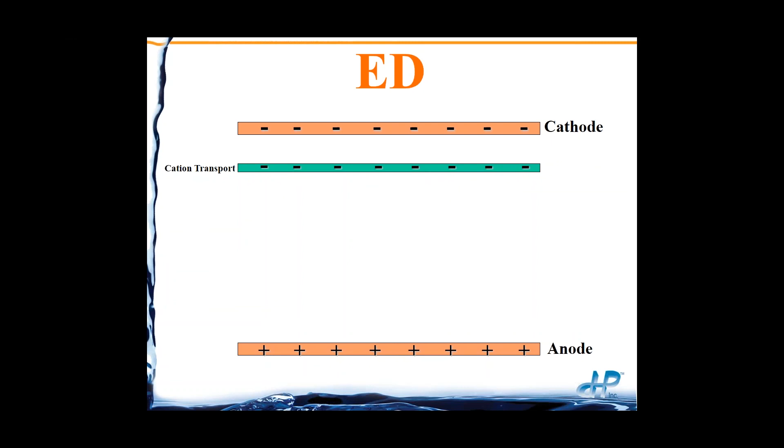And then in between these electrodes, we're going to put basically ion exchange resin sheets. But in this case, we're not worried about ion exchange. We're really just wanting to transport cations across cation transport membranes and anions across anion transport membranes. So cations are positively charged ions. They can pass through cation transport resin sheets or membranes, but they cannot pass through anion transport. Same thing. Anions can go through anion transport membranes, but cannot go through cation transport membranes.

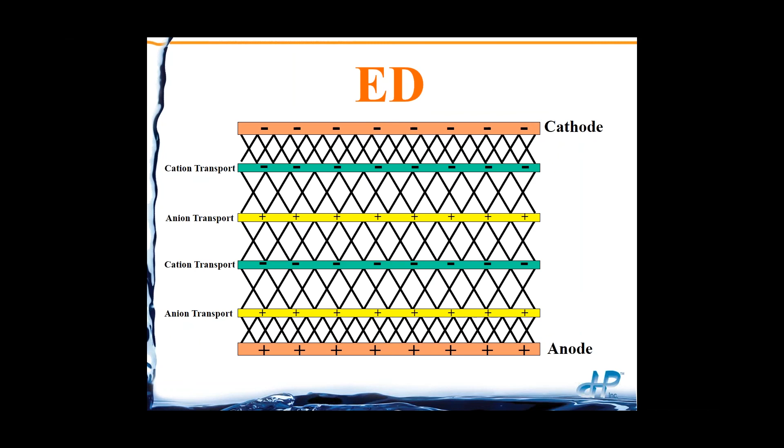So we're going to have alternating membranes between the cathode and the anode. Now there's going to be a spacer in between all these membrane sheets so that water can move between the sheets. So I'm just using these X's here to indicate that they're spacers, but from now on I'm not going to have the spacers. It's just going to make it more complicated. So your feed water is going to go through certain channels, and then it still will be feed water, but we'll call it rinse water for the other channels.

So in the feed water, your positively charged cations are coming in, your negatively charged anions are coming in. You have an electrical potential. You've got this cathode negatively charged. You have this anode positively charged. So the cations are going to, whoops, sorry, went the wrong direction. So the cations are going to be attracted to the cathode. The cations can pass through cation transport membranes. So here, the cations can pass through the cation transport membrane, but they cannot pass through the anion transport membrane.

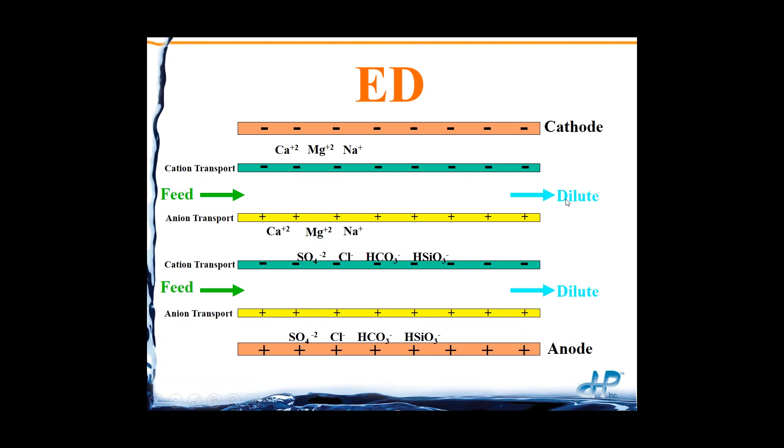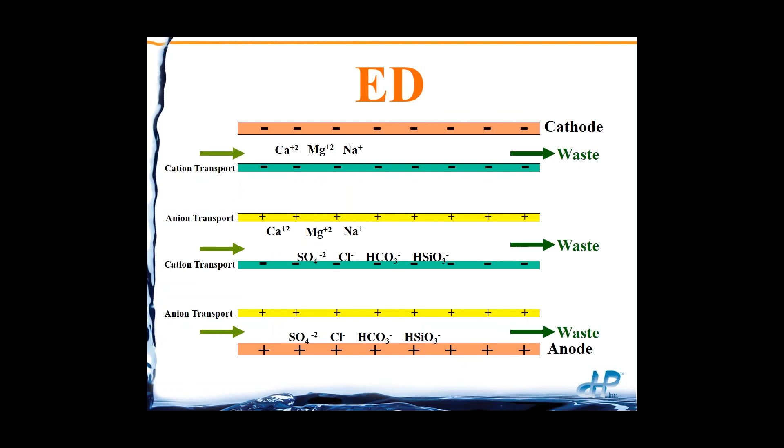Your anions are going to be attracted to the positively charged anode. They can pass through anion transport membranes, but they cannot pass through cation transport membranes. So what happens is that your ions are leaving the feed channels, and we then call these the dilute channels. The other channels are where the ions are concentrating, and these are going to be the concentrate channels or the waste channels. So pretty cool technology, but it was fairly high scaling and fouling on water and wastewater.

So the fix to that was electrodialysis reversal, in which case every 10 to 20 minutes the cathode is going to become the anode. So we're going to change the polarity every 10 to 20 minutes typically.

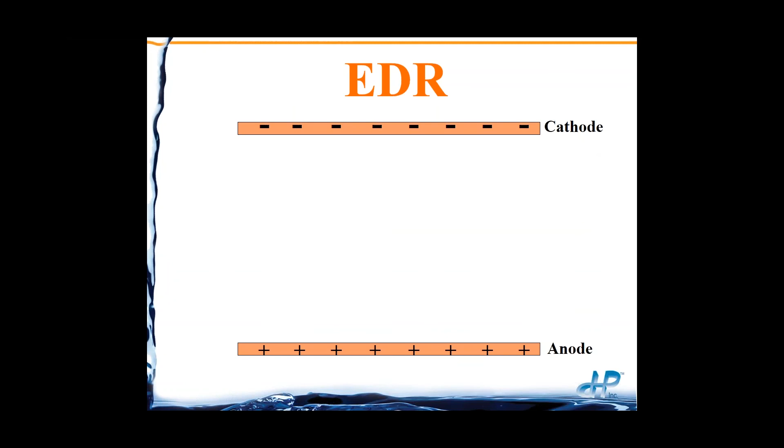So we're still going, I keep hitting the wrong buttons here.

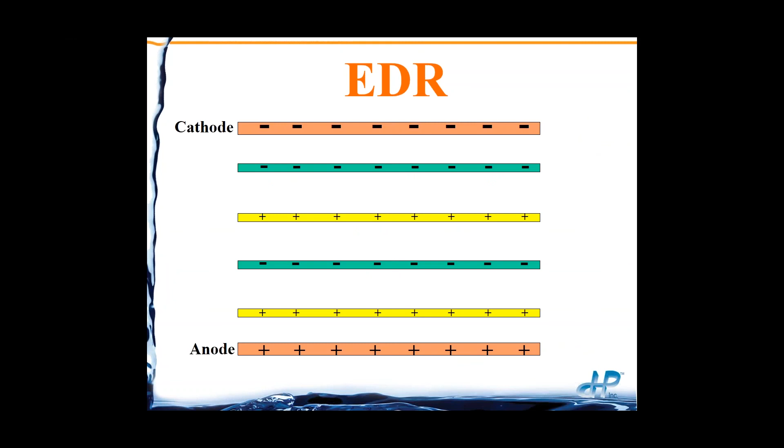We're still going to have the cation transport and anion transport membrane sheets, exactly like we just saw with ED, but our dilute channels every 10 to 20 minutes are going to become waste channels, and our waste channels every 10 to 20 minutes are going to become our dilute channels. That way, as scalants and foulants accumulate on the membrane sheet, once the valving swaps over and your waste channels become dilute channels, they get cleaned off.

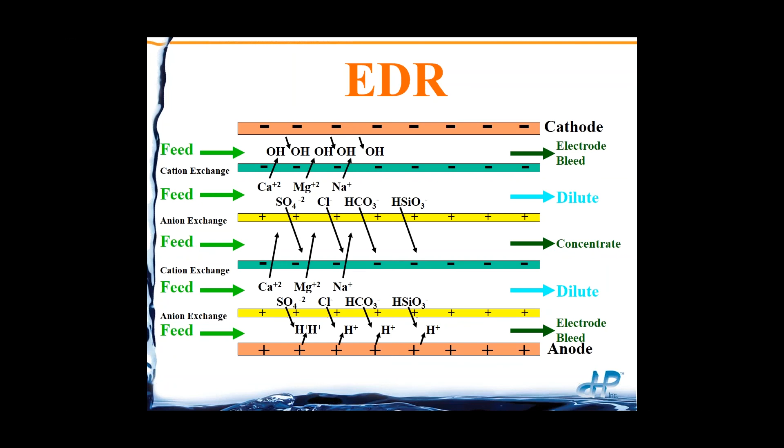But everything we talked about for ED is going to be true for EDR. So the cations go across the cation transport membranes. They're trapped in the concentrate channels. The anions pass out of the dilute chambers or channels and go into the concentrate channels. So no different, except the dilute and waste channels are switching every 10 to 20 minutes.

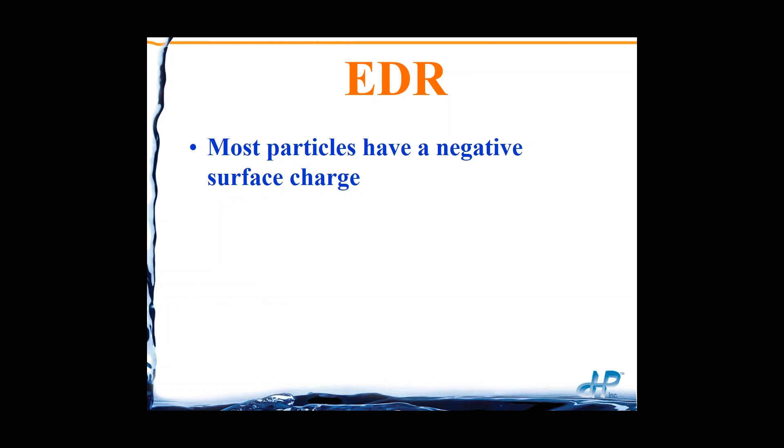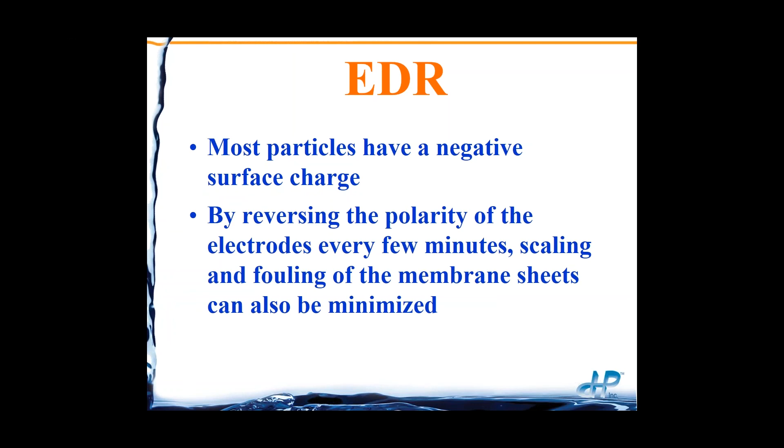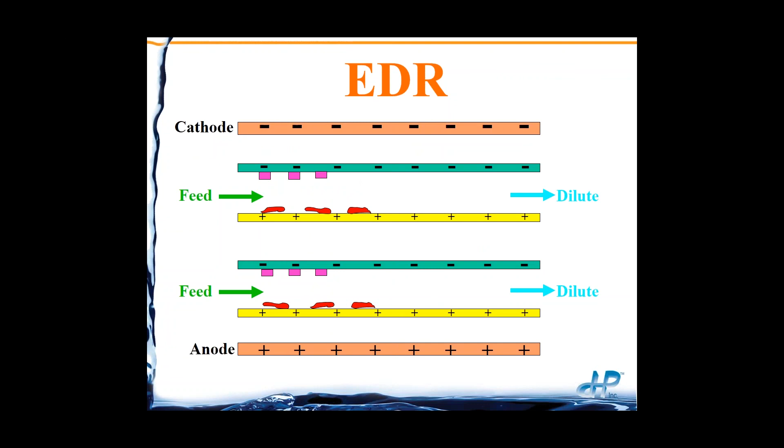So as far as suspended solids, most of your particles in water have a net negative surface charge, so they're going to be attracted to positive charges. We also have scalants and organic material that can be attracted to one or the other of the membrane sheets. Well, the beauty of EDR is every 10 to 20 minutes, even though these foulants and scalants may be attracted to the membrane, we're going to swap the polarity, and that then is going to draw these materials off of the membrane.

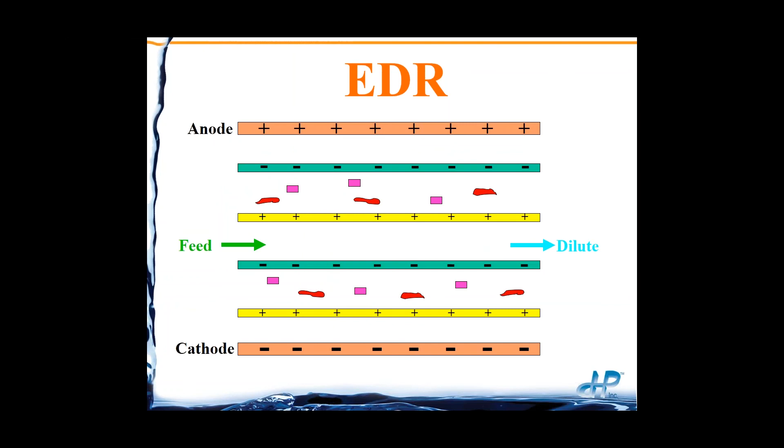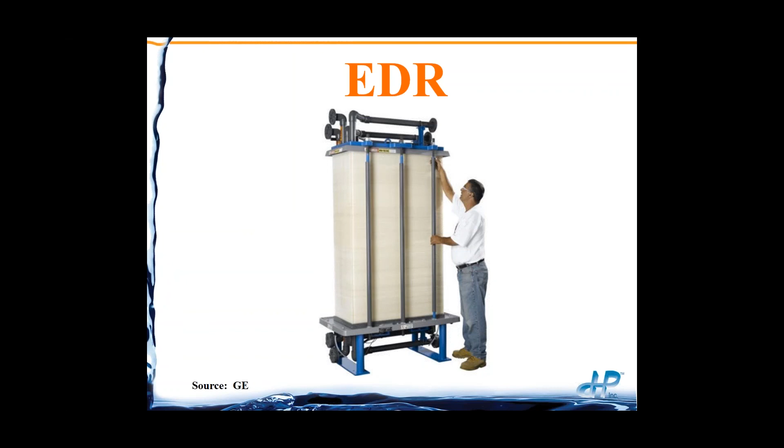Ionics was the company that started this, back in the 60s. GE bought Ionics in the 80s or 90s, I don't remember when. So when you see GE or GE Ionics, this is one of the original big stacks that they had. They were horizontal stacks. Today, because the patent has expired, there are some other manufacturers. The one that we're here to talk about is Saltworks.

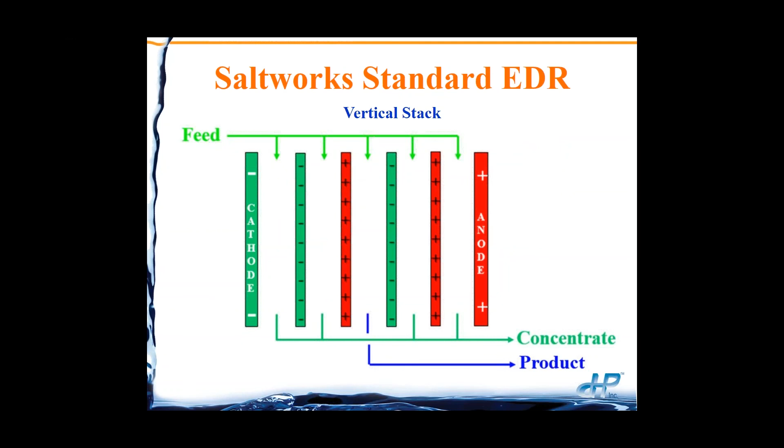Now Saltworks does have a standard type of EDR, but the membrane sheets are vertical instead of horizontal, and also Saltworks makes its own membrane, so it has some specialty membranes that can do some things that are unique. Ben is going to go into the details of this, but just see that the membrane sheets here are vertical instead of horizontal.

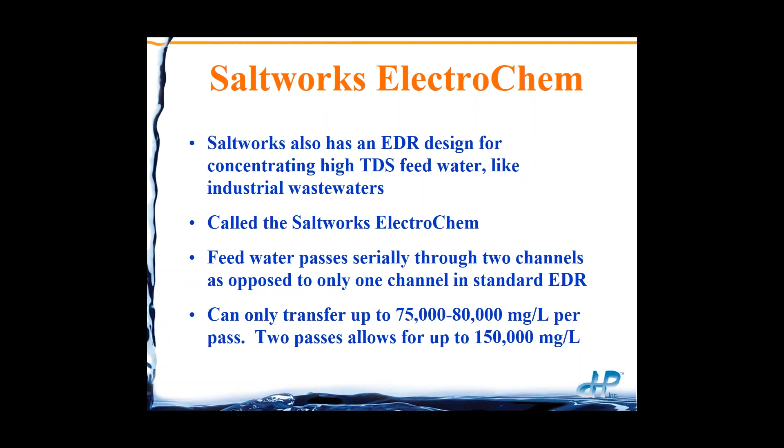But the one we're most interested in, especially for wastewater, but also for really high recovery on the water side, would be this ElectroChem. In this case, instead of just passing through one pair of cation and anion membranes, it's actually going through two. By doing this, you're able to go about 80,000 milligrams per liter per pass. And depending on the scaling potential of the water, maybe even up to 150,000 milligrams per liter if it was like sodium chloride. So it's a little different than a strict EDR, but we'll let Ben give you the information on that.

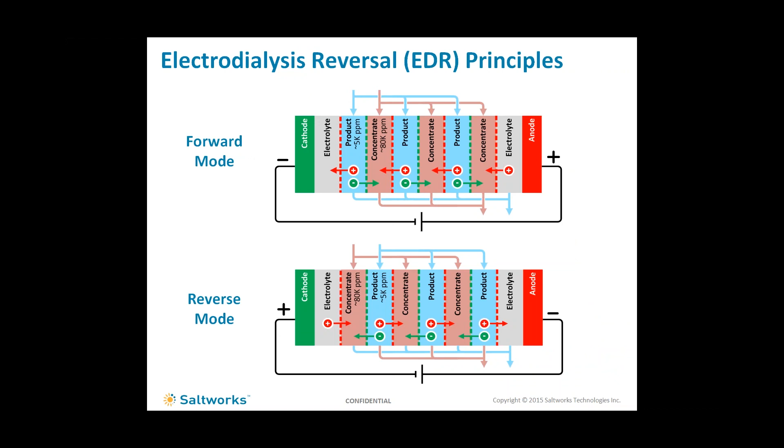Now, we often run into a very famous curve that was published by the USBR around 2003. And many in the industry refer to this curve. And I have to be honest, the curve is correct, but the technical understanding of it has been misapplied. This curve shows that EDR should be more energy efficient for desalting waters below 3,500 milligrams per liter, and reverse osmosis should be more energy efficient above 3,500 milligrams per liter. That is true, assuming both technologies are desalting to 500 milligrams per liter. So RO permeate at 500 and EDR treated water at 500 milligrams per liter. This curve is true under those assumptions.

Now, where we practice, we tend not to use EDR to desalt to low levels, such as 500 milligrams per liter. So we call that EDR 1.0, the conventional application. This is where we practice. Now, there's been some good work actually out of MIT that has published curves around where EDR may fit, where RO may fit, and where the EDR-RO hybrids start to come into place. And this is very much the same sort of message. Every water is different, every application is different. Nevertheless, EDR is more energy efficient if you do not desalt to a very low level. And we'll get into the hybrids and how you can leverage hybrids to achieve that.

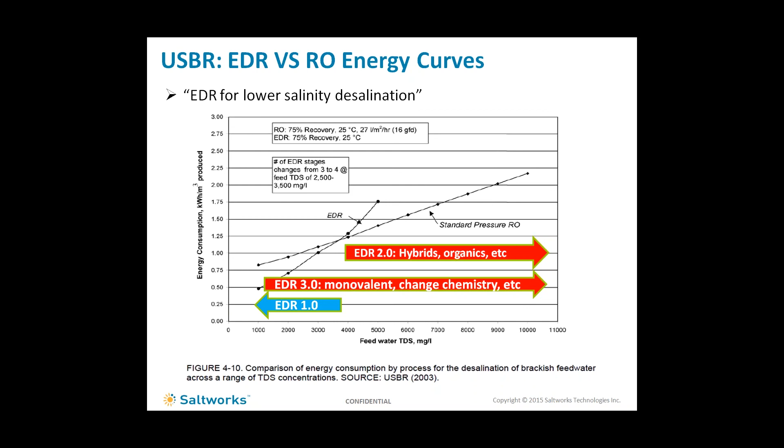And then furthermore, with EDR 3.0 and monovalent ion exchange membranes and changing chemistry, everything starts to change. Previously high conductive waters have low conductivity behaviors. That is outside the scope of this presentation, but there's still lots of good innovation for the water sector coming down the pipeline. So, the curve is correct; the message has been wrong or misunderstood.

In reference to an EDR-RO hybrid, this should help show this. So, we have feed water entering a system, and let's imagine that that feed water is 10,000 milligrams per liter. EDR is very effective and energy efficient at desalting from, for example, 10,000 milligrams per liter down to 5,000 milligrams per liter. All membranes tend to have a higher preference for removal of multivalent ions. This means that when you're desalting with EDR, you will tend to pull the troublesome actors out first. So you'll tend to pull out calcium and magnesium and sulfates, all of the scaling ions.

They'll come out first. So in this example, we use EDR, or what we call ElectroChem, to desalt the feed to the reverse osmosis. We're lowering the salinity, but more beneficially, we're softening the water. So this is electrochemical softening upstream of reverse osmosis.

Now the RO operates on reduced calcium magnesium sulfate load. In addition, there's a secondary benefit. The reverse osmosis brine can be recycled and provide the salt acceptor for the EDR system. So you end up concentrating the reverse osmosis brine at the same time. So with the EDR-RO hybrid, you get these two benefits. Electrochemical softening, get rid of lime, get rid of soda ash, get rid of the operational headaches, and you further

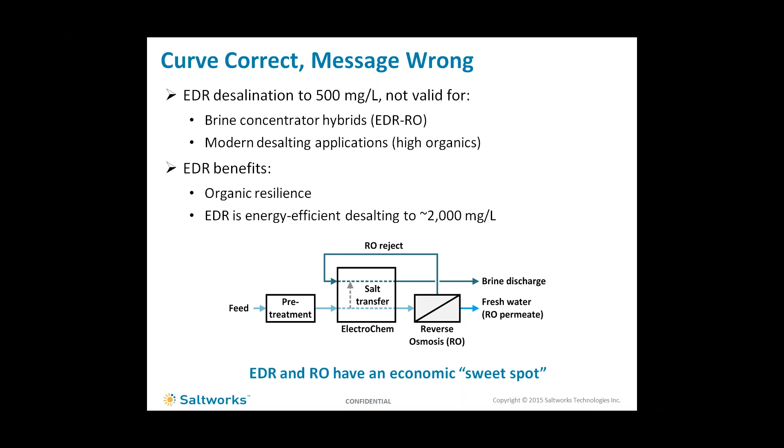concentrate reverse osmosis brine. What this looks like on a data basis, actually, pardon me, I'll go through the drivers first. So, when you're thinking about EDR and sizing EDR, try to remember these three things. If you use EDR to desalt to a lower TDS, your operational cost will increase, notably. So for example, below 2,000 milligrams per liter TDS, you can use EDR to keep desalting. However, your membrane flux must be decreased, notably. Your water resistance increases. All of this translates into more power consumption. It also translates into additional membrane area.

So we find it highly beneficial to operate our EDRs above 2,000 milligrams per liter outlet, or EDR permeate, if you will. Now, when we're in monovalent mode, that all changes. In addition, with EDR, an interesting thing happens that increasing brine concentration really doesn't change costs that much. So there's a technical limit often for brine concentration. That's usually due to one of two things. One being scaling. You can still scale on a concentrate chamber of an EDR system. So that's one of your limits.

If you do not run into the scaling limit, you'll eventually run into an osmotic flux limit, where the high concentration brine and the electroosmosis of water through the membranes adds more water to the concentrate than you're able to concentrate. Long story short, you level off on your concentration, you can't drive it any higher. We often find that the limit for electroosmosis is about 120 to 150,000 milligrams per liter. You can push it higher in ideal lab settings, but in a practical setting, you can use an EDR-RO hybrid to concentrate to about 120,000 milligrams per liter, assuming no scaling limits limit you first.

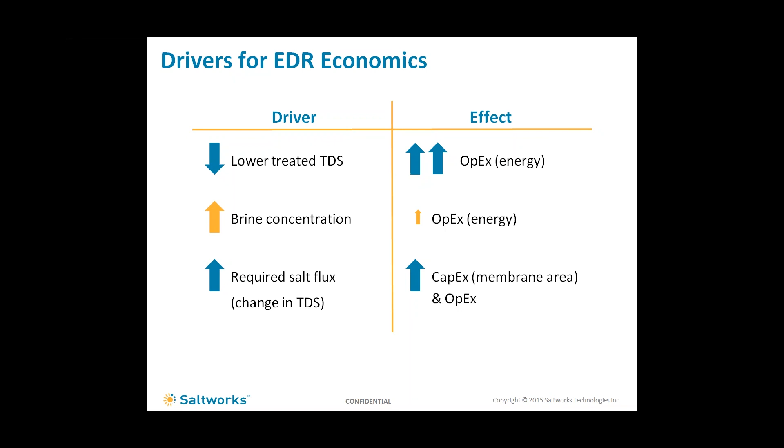So, some differences between conventional EDR and what we call our advanced EDR. Again, we are standing on the shoulders of others. EDR has been a fantastic technology. It's also had some problems. What people told us, and this includes some advice from those who originally helped develop the EDRs at Ionics, one of the issues was electrode fouling. You have a cation exchange membrane next to an electrode. Calcium can get in there. If you use sodium sulfate as your electrolyte, you now make calcium sulfate and you foul your electrode.

People have managed that in different ways in the past. In China, they frequently use sodium chloride as the electrolyte, but that produces chlorine gas, which is a hazard. People also dose their electrolyte. We don't do that. We have a patented electrode blocker. So we electrochemically prevent any calcium or magnesium from ever entering the electrode. This means that we can use low-cost and safe sodium sulfate. No chlorine production, no need to acid dose. It becomes cheaper and more reliable. This also broadens our range of operating.

We can operate on higher calcium magnesium loaded waters. Sometimes people use EDR with chemical softening up front. We really try to avoid that. One of our investors, one of the big oil companies, the vice president asked me one thing. He said, "Ben, get us off the drugs." You know, they really do not like softening. So it's a safer, more simple electrolyte, and we're leveraging all of the innovations of the past. When it comes to the membranes, some excellent membranes were developed.

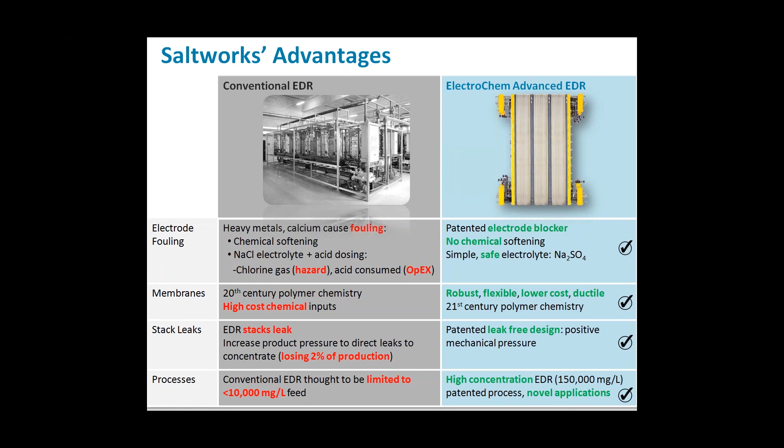So, IonFlux ion exchange membranes. These are homogeneous membranes, which means they're continuous throughout. They're cast on a PET backbone with a novel polymer. And that novel polymer is cured. And what comes out of our membrane production machine is a ductile, flexible ion exchange membrane. That was one of our big value adds for ion exchange membrane chemistry. We developed a ductile ion exchange polymer.

In addition, that ion exchange polymer is made with low-cost inputs without the need for pressure, temperature, and carcinogens. So it's more like making soup. This has been a real advantage for us. So the membrane's easier to produce. We can produce it at a lower cost. I would challenge any homogeneous membrane supplier to a cost bake-off.

In addition, we do have these high multivalent ion transports, but really our true benefit is the mechanical integrity and the robustness of the membrane. It looks and behaves and feels very similar to vapor barrier, what you buy at Home Depot and put in your home behind drywall. So you can flap it around. With that robustness, it offers a longer life and it has a smooth surface.

Now, what we've gotten into over the last number of years is applying coatings to our membrane. And we weren't the first to do this, and these coatings allow monoselectivity, enable you to get selective, but also, quite importantly, we've developed an anti-fouling coating that helps prevent organic fouling of the membrane.

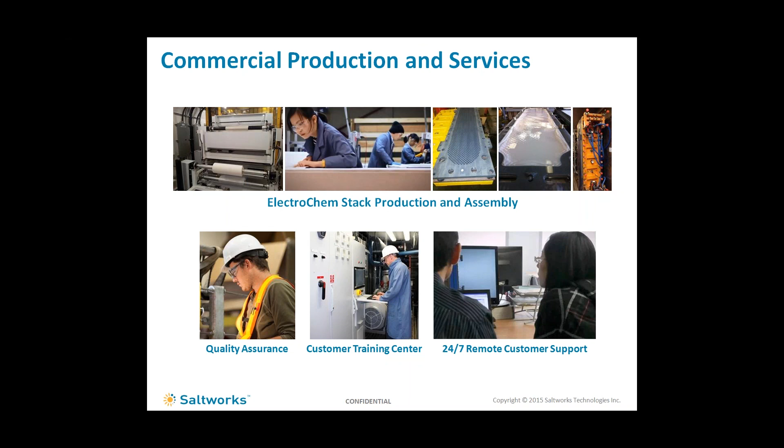Bench results, we do a fair bit of bench testing for clients. The bench results with electrodialysis scale up very well to full scale. It's a nice linear scale up. If the chemistry works at a small scale, it works at a large scale. You encounter mechanical challenges and other issues as you get to full scale, but the chemistry is the same.

In bench work, if you ever do bench EDR work, what we often focus on is proving 2 things. Number 1, brine concentration. That's really the name of the game for the customers. Concentrate the brine as high as possible. So brine concentration limits. Number 2, flux. So how many membranes, what's the size, what's the energy, et cetera. And of course, there's the requirements of treating water to certain levels, what's the output chemistry, et cetera. But long story short, EDR scales up very well.

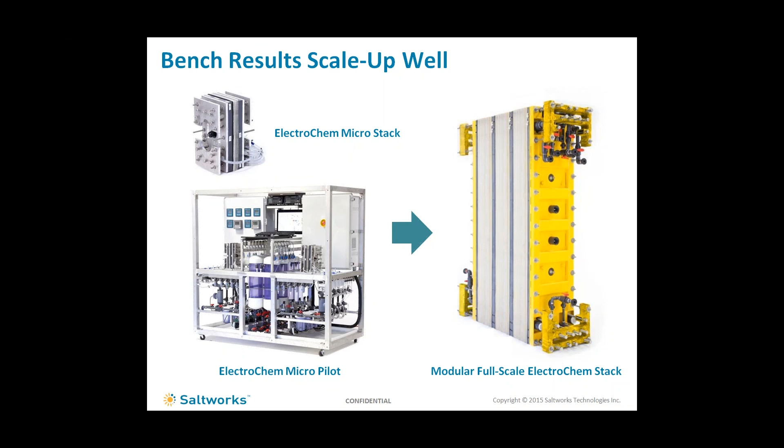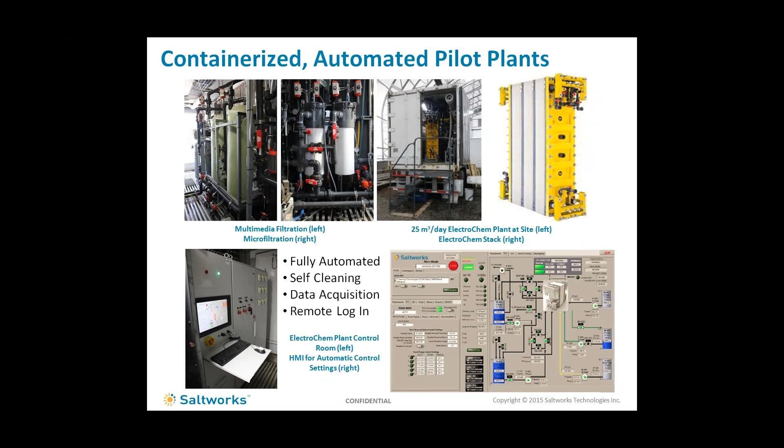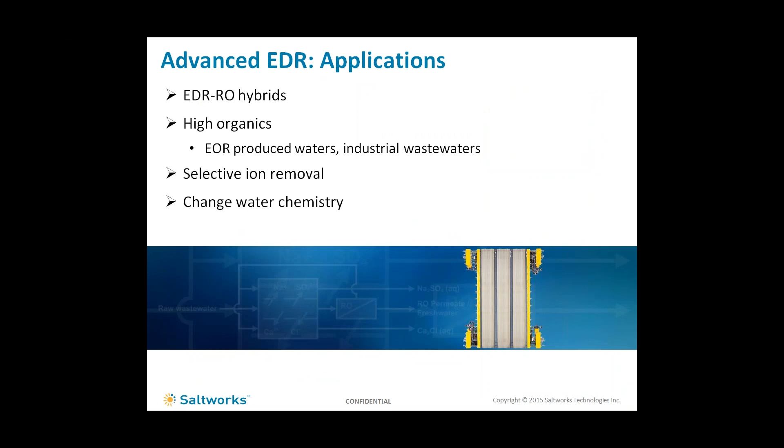In this system, you're not changing water chemistry, which means you can still run into the same scaling limits that you would run into in any other system. So calcium sulfate often will limit recovery of this system. You can push an EDR-RO hybrid to higher calcium sulfate levels in the brine than you can with reverse osmosis alone. You need to use aggressive antiscalants, just like reverse osmosis, and you need to practice electrodialysis reversal, just as David touched on. That enables you to go a bit higher.

Now, one thing that the EDR system doesn't do is it does not remove silica and it does not remove boron. So that means you need this RO downstream if you want to remove silica and boron. In addition, this system does not remove scaling limits associated with silica. So silica can accumulate in the RO reject loop. And we often find that the recovery limits of an EDR-RO hybrid are governed either by calcium sulfate or silica, but we also frequently find that it does offer these benefits of reducing brine volume and removing chemical softening.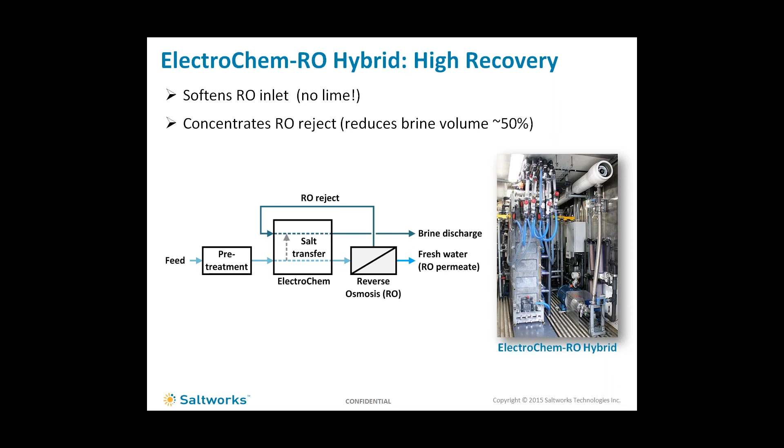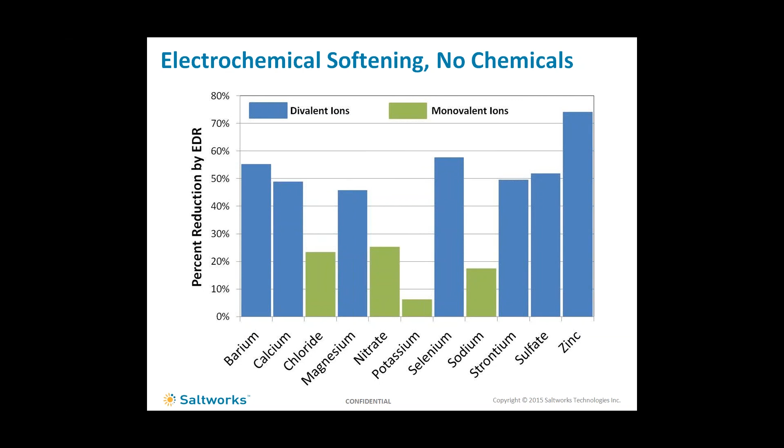Here's an example of how it electrochemically softens. Ion transfer rate of different ions. Long story short, higher transfer of divalent ions such as calcium, sulfates, etc. than the monovalents. Here's a data curve of what it looks like. So the black line at hour 20 is when the EDR unit is turned on. So at hour 0, the red line is the brine or the concentrate. The blue line is the reverse osmosis feed.

At hour 20, bang, the EDR is turned on. You can see that the RO feed is desalted. Its conductivity lowers. And again, we're largely softening it, but also pulling out some monovalents. In addition, the brine is being concentrated until you reach a steady state brine concentration and run at that level. So we reach steady state around 175 hours. Now the concentrate is charged. You keep running at that level, discharging concentrate, making up your concentrate volume with whatever fluid you may have. Preferably, we use the EDR outlet flow.

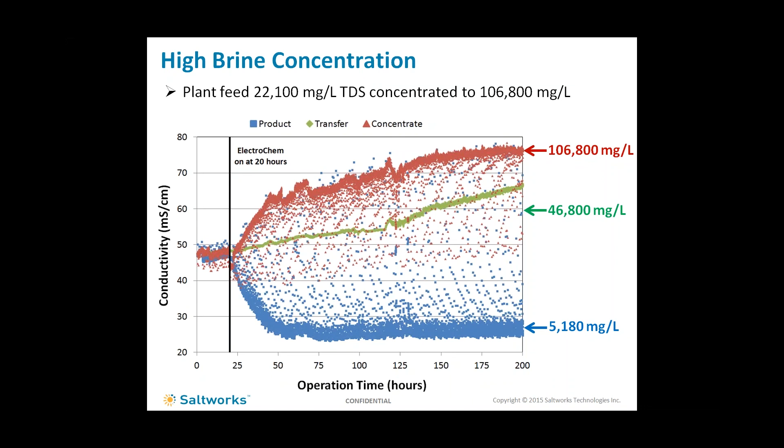The green line, we sometimes use a 3-compartment stack where we increase the concentration in multiple stacks. David briefly touched on that. I won't go into much detail. But if EDR was a ladder with 2 rungs, you can only transfer ions across a membrane concentration difference of about 60 to 80,000 milligrams per liter before you start to run into problems. So that would mean EDR can only concentrate 60 to 80,000 milligrams per liter. Saltworks has a patent on this. We added a 3rd rung to the ladder, so you do it in 2 steps. You concentrate 60 to 80,000, and then you further concentrate 60 to 80,000 again in a single stack. That's what we do in our transfer chamber.

So we'll now get into produced water, what we call our produced water desalter. We've just started doing some work on municipal wastewater centrate with the same system, and it's proving to perform very well. Most of our experience basis is, however, on oil and gas produced water. We've been working on this with 4 of the world's biggest super major oil companies. If you read The Economist and if you believe what they say, the super majors, not the national oil companies, not Saudi Aramco and not Venezuela, believe that some 40% of their oil production moving forward is going to come from water flood enhanced oil recovery.

So here's some water flood enhanced oil recovery water. We ran experiments with 4 of these companies at various different times. Only the salts flux through the membrane. We're able to adjust the produced water salinity back down to their optimal range for re-injection. We include our hydrocarbon resistant membranes. You can see a picture of what the water looks like. We did pilots both with and without pre-treatment, and to our shock, the results were the same. We have some special art in our stack, thicker spacers to prevent plugging due to particulate, and again, the coating on our membrane.

The produced waters we've tested have a nominal inlet TDS of anywhere from 15,000 to 45,000 milligrams per liter, and then again, we pull it down to that optimal reinjection limit of about 2,000 milligrams per liter. The oil companies like a little bit of salinity in their water when they re-inject it. It helps push out more oil. And there's some tuning of salinity of certain ions that you can do as well. Now, the alternative to using EDR to do this would be reverse osmosis, and I'm one of reverse osmosis' biggest fans.

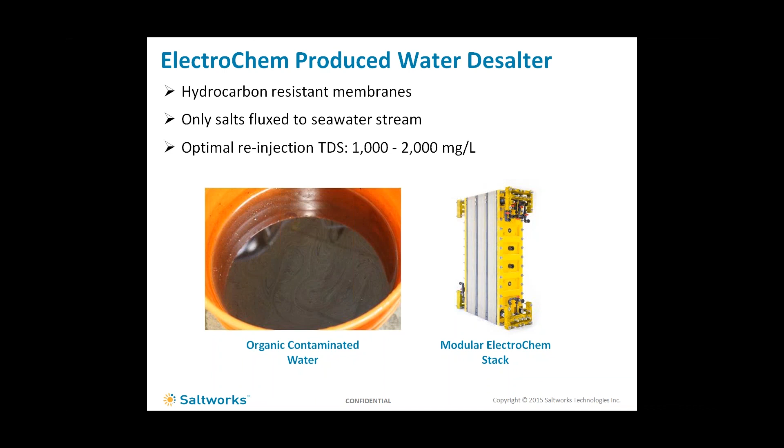Now, this is small pilot bench days come 2020. Expect to see more of this out in the field. This is long game for Saltworks. This is also long game for the EOR producers. Some chemistry. So again, no pre-treatment. You can see the produced water chemistry here. There's, well, this one 5,000 to 40,000, then desalting down to 1,000. And you can see lowering hardness, leaving some chlorides in, and lowering sulfate as well.

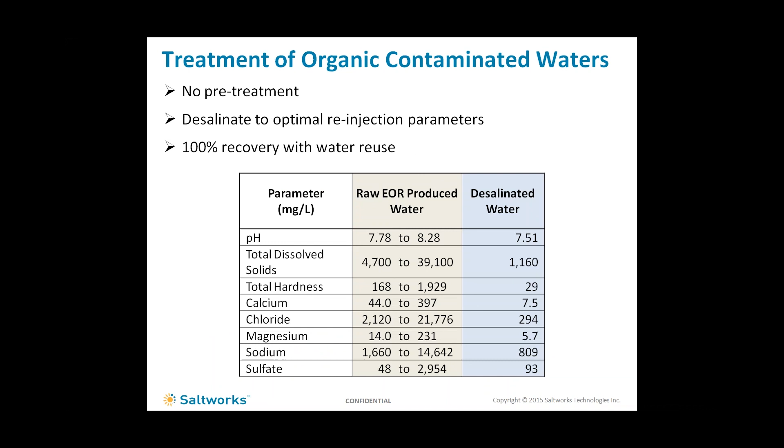So we'll now get into our salt splitter system, which is very much standing on the shoulders of 2 incredibly bright gentlemen. The concept is called Electrodialysis metathesis, or EDM. The concept is to change low solubility calcium sulfate permanently into high solubility fluids, sodium sulfate and calcium chloride. And I'll come back to that.

So this concept was first presented by a Japanese gentleman, Hamano, in 1993, specifically to changing the water chemistry. And then Dr. Davis from UTEP very much further improved on it through ZDD Corporation. And Saltworks is continuing that work. We're continuing to improve on it.

And really the fundamental concept is calcium sulfate has a low solubility. Call it 2,000 milligrams per liter without antiscalants. Sodium sulfate, calcium chloride are highly soluble, well over 100,000 milligrams per liter. So split the calcium sulfate into two compartments, make sodium sulfate, make calcium chloride. They're now both highly soluble.

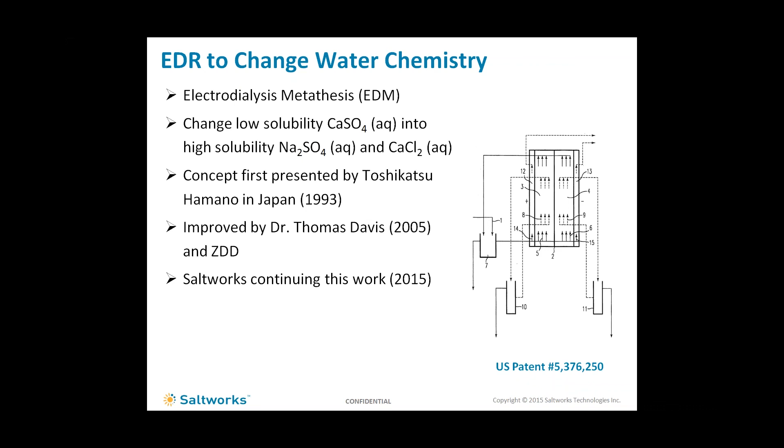So with this, again, it's no softening, no lime, no soda. It's a membrane system, it's a hybrid. And most people on this call will know that membrane systems are often an order of magnitude lower cost than a thermal system. We're a thermal system builder too. So we often try to keep clients in the membrane world to keep their costs down. You can achieve extreme recoveries.

We've gone through a very successful pilot that's now being expanded with one of Canada's major mining companies, who actually also ended up becoming an investor in our firm due to this success. So a gypsum saturated water that conventional reverse osmosis without softening could achieve 40% recovery. With softening, both lime and soda, could achieve 70% recovery. The membrane system right now is running at 96% recovery with saturated gypsum on the inlet. So everybody on the project has seen that as a huge success.

And again, you're changing water chemistry, as this diagram shows. You're moving the sulfate and the calcium into two different process units, two different pipelines. You're separating those brothers and sisters once and for all, and you're giving them a new brother or sister, sodium or chloride, so they're highly soluble. Now, similar to the other EDR-RO hybrid, this does not solve the silica problem.

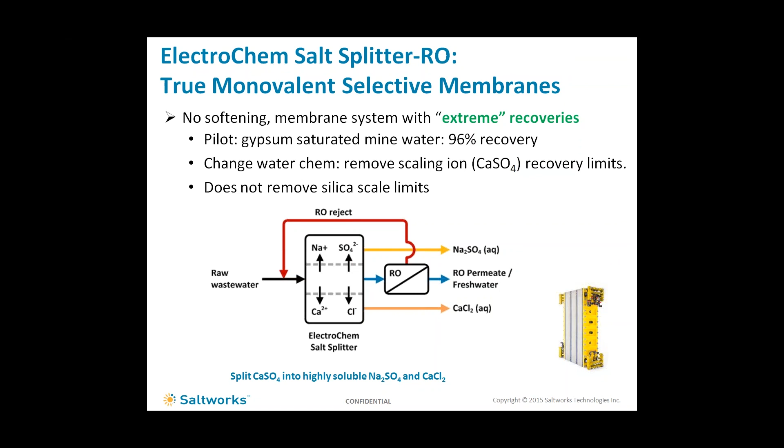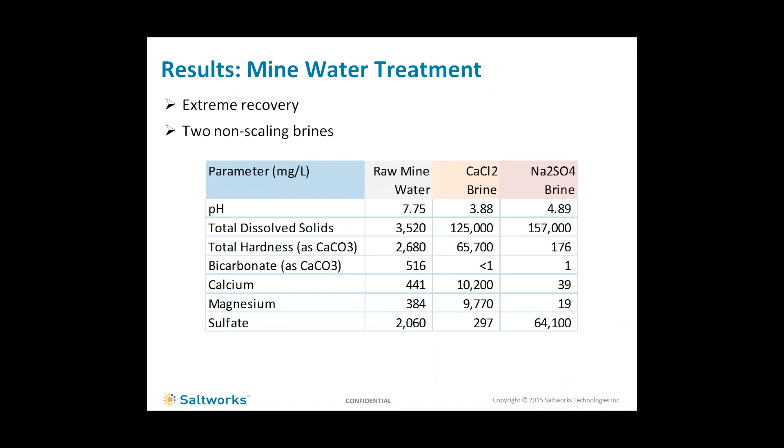Now, a little bit of a treat at the very end. We've developed a third product line. We've adjusted our membranes and tuned them to pull out ammonia. Ammonia is becoming more and more important in the wastewater and the industrial sector. If you don't know, it causes challenges in our aquatic environment. Ammonia is wonderful for farmers.

It's a brilliant fertilizer, but it also fertilizes rivers, lakes, and the ocean and creates algae blooms and all sorts of other problems. If you were following the news, there were over 30 whales found dead on the west coast this year, all of a sudden, and the suspected culprit was an algae bloom. Whether or not that was caused by environmental things that could have happened anyway, or increased ammonia being discharged from North America. So we've been working on ammonia and tuning our ion exchange membranes to pull out ammonia.

What we do is again, our same stack, our same EDR system with a slightly different membrane. There's some chemistry that occurs. We pull ammonia out, we convert it to ammonium. You then have two options of what to do with that ammonium, or three options. So this is a two-stage system.

The red line is the source water with the ammonia. We pull the ammonia out into a closed-loop ion capture fluid, the green line. It's now ammonium X. X could be sulfate, could be chloride, could be nitrate. The regenerator is an add-on. It's an option to burn the ammonia off electrochemically as nitrogen gas and destroy it once and for all.

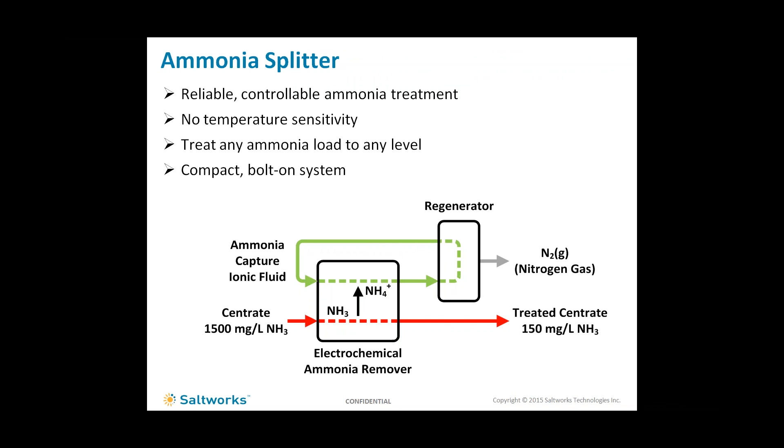So here are your three options of what to do with the ammonia once you pull it out. Option one, it is the most expensive. Electrolyze it to nitrogen gas. It requires the highest amount of energy, but then the liability is gone once and for all. You've permanently destroyed the ammonia. Now, you can get cute and you can make fertilizer, you could make ammonium sulfate. You can usually only concentrate this to about 7.5% by mass, so it's not industrial ammonium sulfate concentration, but it may or may not help if there's a blending facility nearby.

Where it gets very interesting is making ammonium nitrate. Many wastewaters have these two troublesome actors in them. They have ammonia and they have nitrate. If you put the two together, all of a sudden now you have a high value compound. Ammonium nitrate is one of the highest value fertilizers. Unfortunately, it's also used by people for other means, but I won't get into that.

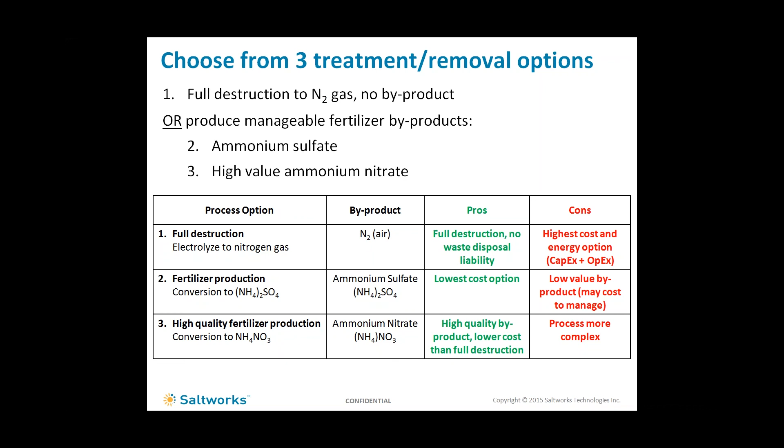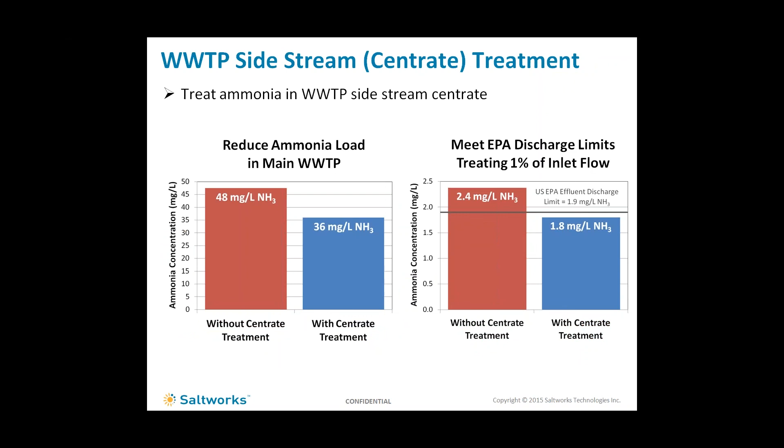So some data. If, for example, you were to put an ammonia splitter on a wastewater treatment plant on centrate, you can pull ammonia out of the centrate, lower the mass load in the centrate, which is recycled to the front end of the wastewater treatment plant. You now have less ammonia circulating. It's easier for you to meet your discharge limits.

So with that, we welcome any questions. We will be able to speak about the technology that's released. We will not be able to speak too much about what we're working on.